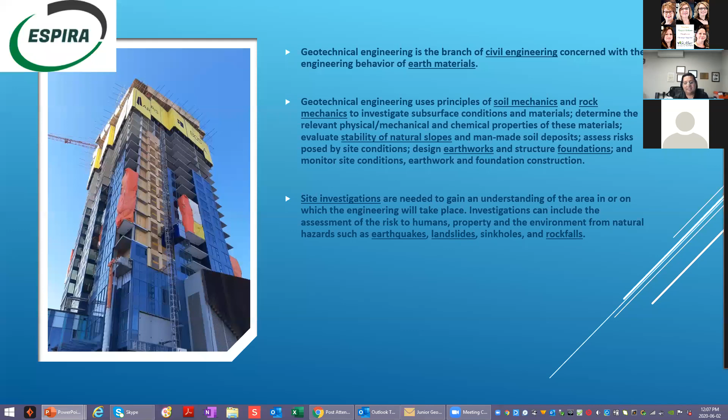Now, anytime you want to do a project, build a project like roads or high rises or commercial buildings, etc., the first thing you probably need, one of the very first essential things, is geotechnical engineering. Can we build what we're planning to build in that particular site? So that's, kind of in a nutshell, what geotechnical engineering is.

Now, a geotechnical report is generated for different audiences, so it means different things for different readers. For example, for an owner, what does it mean to the owner? If someone is deciding to buy land, a lot of times they get geotechnical engineering professionals involved to make sure that land is suitable for the purpose of their purchase.

Now, developers, they want to build high rises, things like that, commercial or residential buildings. So they want to know what challenges they will face. They hire the geotechnical engineer to assess, and that report explains if that land is suitable for the purpose.

The architect - a lot of times the owner, when they purchase land, hires an architect to hire all the other consultants and manage them. So one of the principal things the architect does is hire a geotechnical engineer to make sure that the foundation would be feasible and economical for everyone, so everybody would be winning at the end.

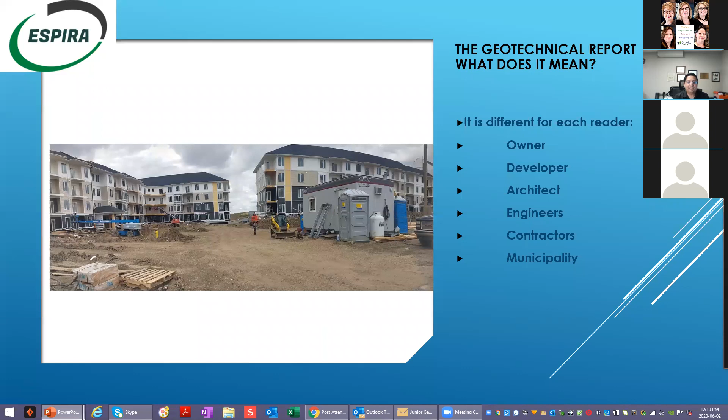So for municipalities, before any project goes ahead for a development permit, part of the requirement - one of the most essential requirements - is to have a geotechnical report.

Now geotechnical, when the geotechnical requests for proposal are sent out, a geotechnical engineer looks at the site and sees what the request is, like what they're trying to build. Based on that, they come up with a plan: okay, I'm going to do 5 boreholes to 10 meters, or I'm going to do 3 boreholes to 25 meters. It depends on the different type of project.

So I'm hearing a sound, sorry, I don't know. Okay.

So when that proposal is accepted, the first thing that geotechnical engineers do is place a one call, or one call clearance, in Alberta, or in Canada in general, before you drill, before you dig a hole, because there are so many pipelines going all over the country. So they place that one call to make sure that they are not going to hit anything.

That's required, so it's also a free service. A lot of times in already developed land, there are electrical lines, etc., going through, and in order to locate those, the geotechnical engineer also hires private locators. Safety is very important because we don't want anybody to get hurt, and that's the first thing that geotechnical engineers do after they get the project.

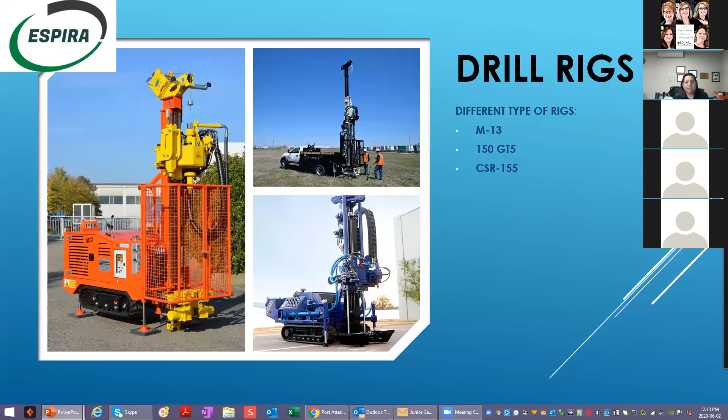So next, let's talk about the type of drill rigs and drilling techniques. Here it is, I hope you can hear it properly.

The 4 most common drilling techniques: solid stem augering with the open hole method, hollow stem augering method, the wash boring method, and the casing method. It will also cover the basics of pushed and driven samplers.

There are a number of types of drill rigs available. Some of the most common are large truck-mounted rigs, sometimes called highway rigs, off-road track-mounted rigs, and trailer-mounted or portable rigs. Different rigs are suited for different site conditions and different drilling and sampling methods.

The large truck-mounted rig is the most versatile and one of the most common drill rigs used. However, it can only be used in situations where it can be driven onto the site.

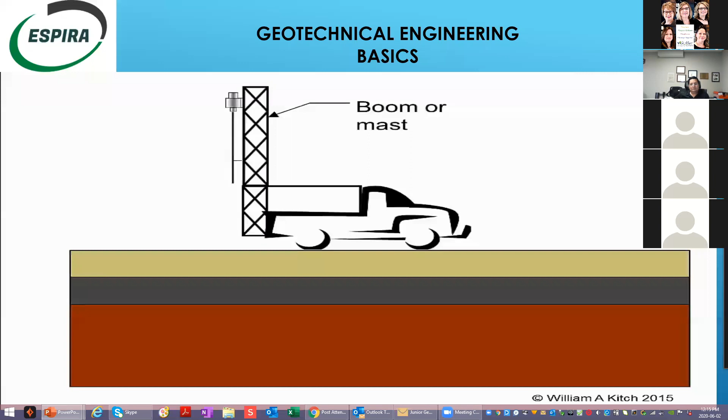The process of drilling is similar regardless of the type of drill rig used. First, we position the rig over the location where we wish to drill. Then we erect the drilling boom or mast and make sure it's vertical. A drill head mounted on the boom performs the drilling and sampling operation, providing two motions: a torque to rotate the bit, and a vertical thrust to raise and lower drill bits and other equipment.

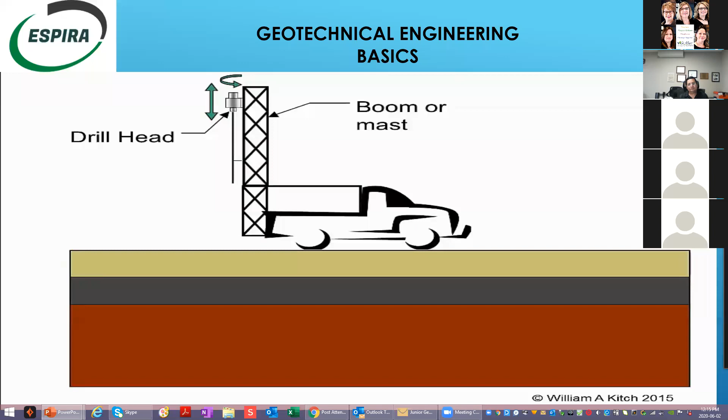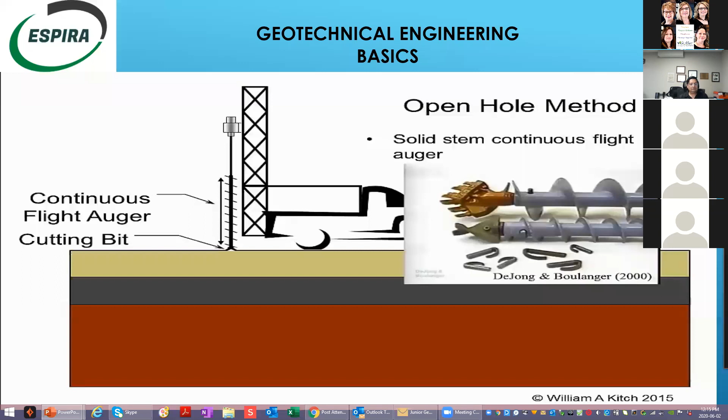The auger is rotated and pushed into the ground by the drill head. The bit at the tip of the auger loosens the soil at the bottom of the hole, and the flights carry the cuttings to the ground surface. An engineer or geologist can estimate when new soil layers are encountered by observing the changes in the cuttings as they're brought to the surface.

These cuttings can be collected as bulk samples. However, they are low-quality samples because they're completely disturbed by the cutting process, and because soil from the upper layers can contaminate soil from the lower layers as the cuttings are carried up the auger flights.

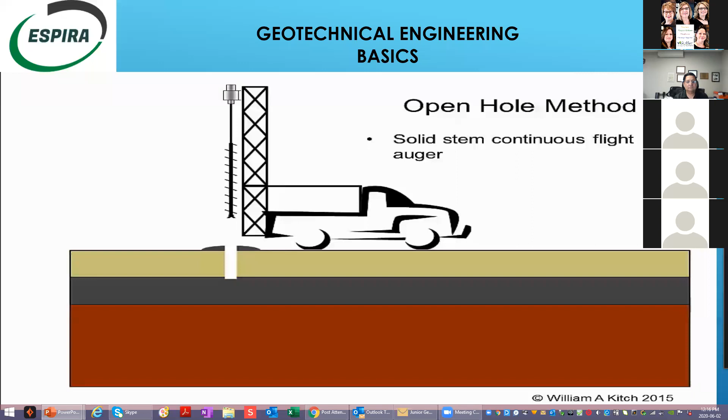When the boring reaches a depth where a higher quality sample is desired, the auger is removed from the hole to make room for the sampling equipment. In this method, the borehole must be able to stand open without support, which is why we call it the open hole method. When we wish to take a sample, we replace the auger bit with a sampling tool, or sampler. Nearly all soil samplers consist of some sort of hollow tube which is inserted into the soil to retrieve the sample. There are many different designs of samplers to suit different soil conditions, but the basic process of sampling is similar for most of these samplers.

The sample tool is lowered to the bottom of the boring and then pushed into the soil below the bottom of the boring. When the sampler has reached its full depth, the rods are twisted to shear off the bottom of the sampler, and the sampler containing the soil sample is retrieved from the boring. The sample is then stored for later analysis and testing.

The sampling tool is replaced with the auger, and the auger is lowered back down the hole. Augering continues until we reach a new layer where we wish to take another sample. The auger is then retracted from the hole and replaced by the sampling tool, and another sample is taken using the same process.

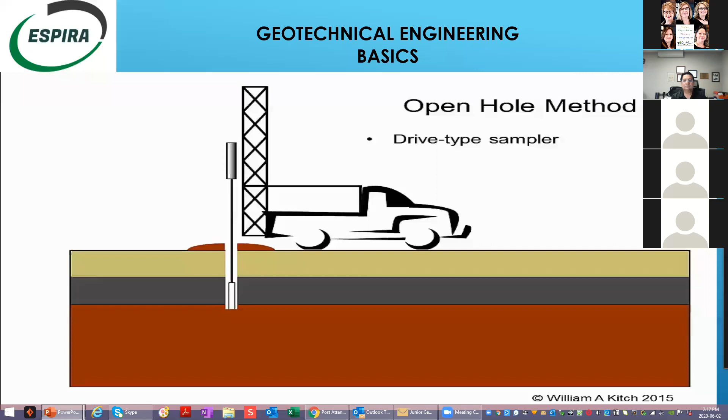When the soil is very stiff or dense, it's not possible to use a push-type sampler. In these circumstances, we use a heavy-walled sampler that can be driven into the soil using a drop hammer. The process is similar to retrieving a push-type sampler, but uses different equipment and a different sampler.

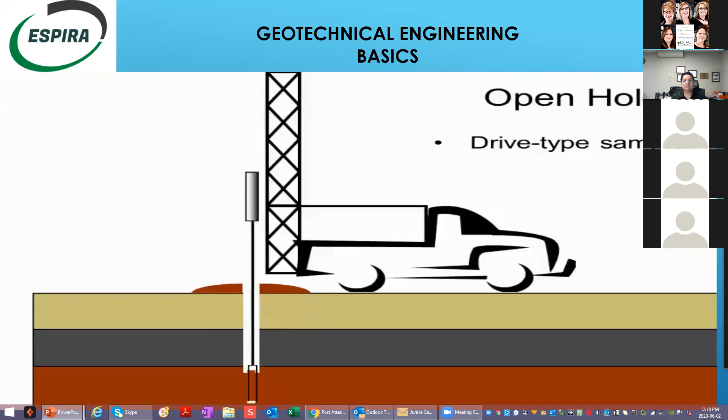The open hole method only works if the soil is stiff enough and strong enough to remain open after the augers are removed. While it is often possible to use the open hole method, many times the soil is not able to maintain an open hole for sampling.

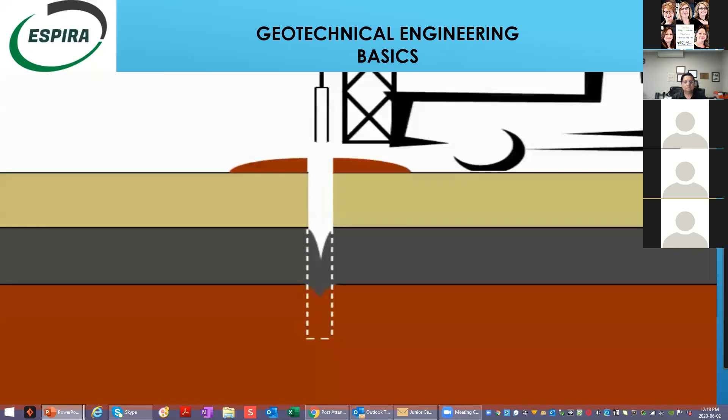If the soil is soft, it may squeeze into the boring when the augers are removed. This often happens in a soft clay layer. If the soil is a clean sand with little or no cohesion, the soil at the sides of the hole may cave or fall into the boring. This is particularly a problem when drilling in sands below the water table.

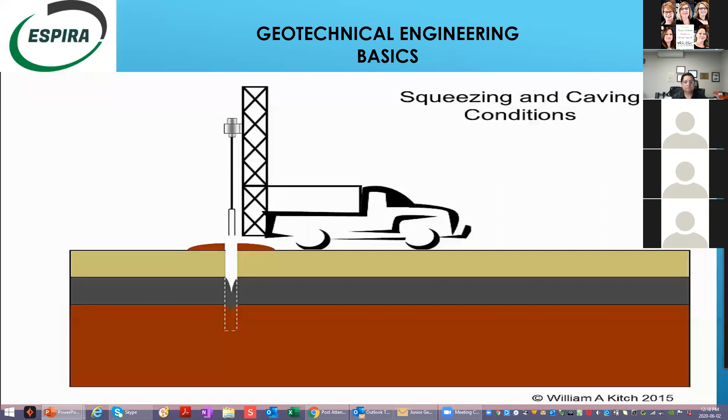When squeezing or caving conditions occur, we must use a different drilling method that will support the borehole during the sampling process. One method that can be used in caving or squeezing soil conditions is the hollow stem auger method.

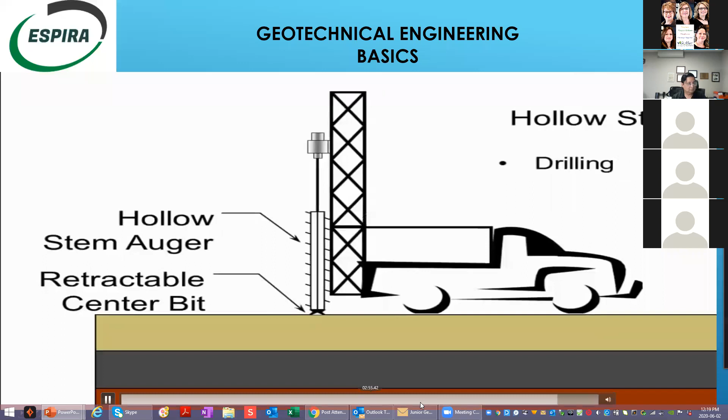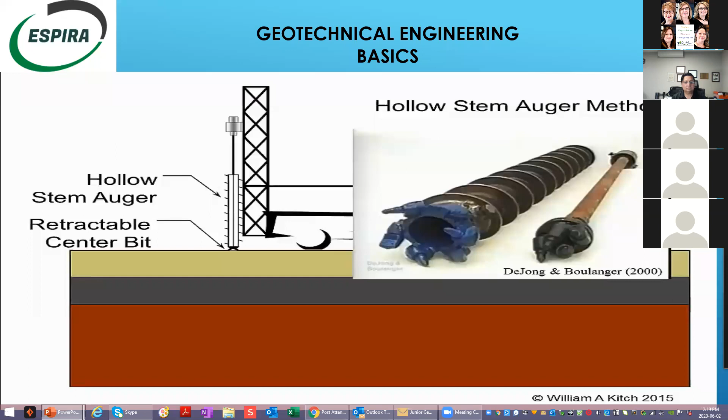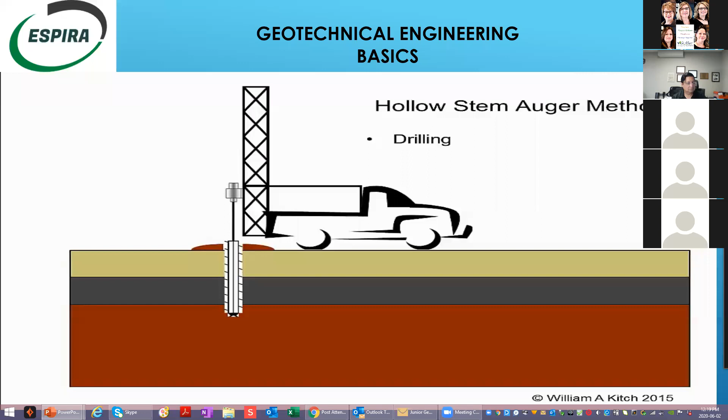For illustration purposes, the center bit has been removed and is shown next to the hollow stem auger. During drilling, the center bit is inserted inside the hollow stem. The augering process proceeds in the same fashion as with the open hole method. When we reach a depth at which we wish to take a sample, we stop augering, detach the center bit from the auger, and remove it.

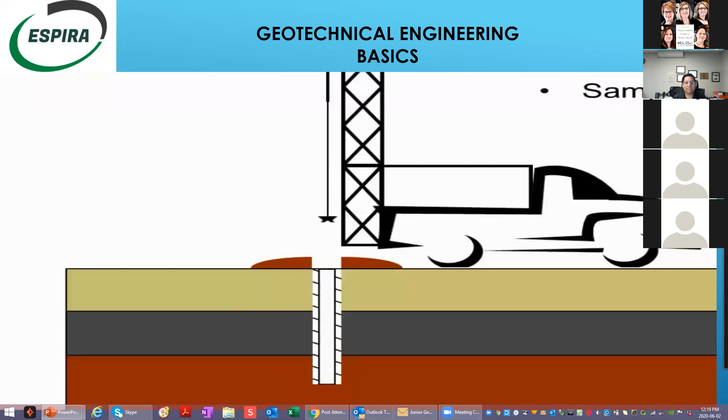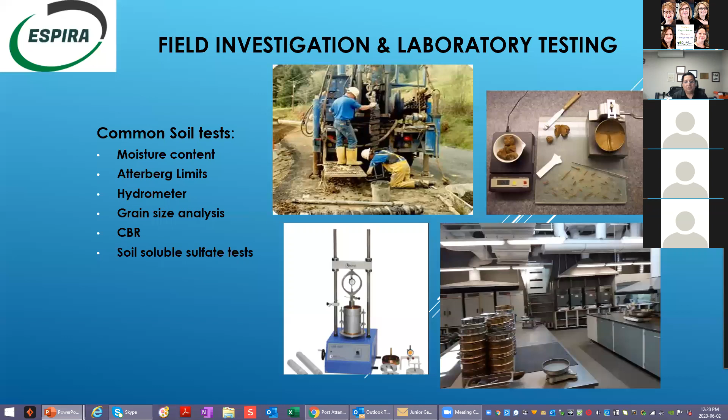About the drill rig. So after the sample is taken, it goes to the lab, similar to this one here, and we do very common soil tests. For example, moisture content is done on every sample, and the geotechnical engineer looks at the description of the soil, and based on that, they decide how many Atterberg limits they're going to do, how many hydrometer, grain size analysis, CBR tests, or soil soluble sulfate tests. This is very common in Alberta and in Canada. Typically, we do sulfate tests to see what type of cement needs to be used, because it's sometimes below the water table for the foundation.

So I just wanted to share some videos with you showing how a couple of these very common soil tests are done. Here's one technique, just a quick overview.

Zero the scale and place a clean, dry sample container with the lid on the scale platform. Record the tin number and the tare, or empty weight, of the container including the lid. Obtain a representative moisture content specimen and place it in the sample container.

Immediately cover the tin with the lid. Zero the scale and place the sample on the scale platform. Record the tare plus wet weight of the sample. Remove the lid and place it below the sample container.

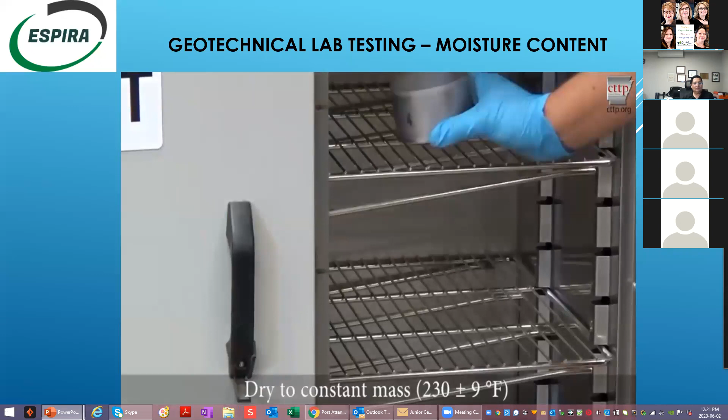Put the sample, container, and lid into the oven. Dry the sample to constant mass at a temperature of 230 plus or minus 9 degrees Fahrenheit. Constant mass means that the change in mass is less than 0.1% after 1 hour of drying. If the sample contains gypsum or has a high organic content, dry it at 140 degrees Fahrenheit or use vacuum desiccation.

Remove the sample, container, and lid from the oven. Immediately place the lid on top of the container to prevent the sample from absorbing atmospheric moisture. Allow the sample to cool to room temperature.

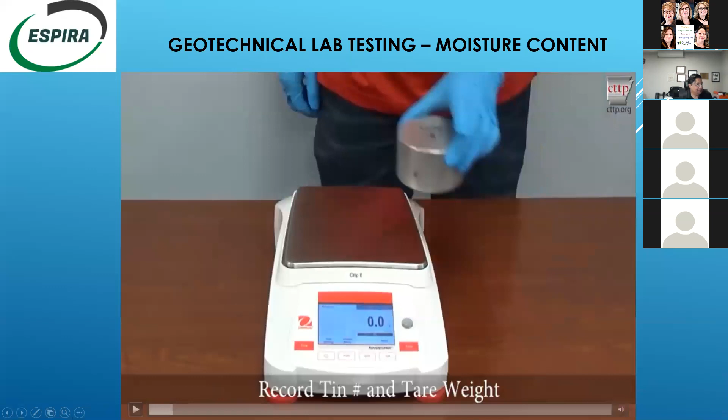Dry the sample to constant mass at a temperature of 230 plus or minus 9 degrees Fahrenheit. Constant mass means that the change in mass is less than 0.1% after 1 hour of drying. If the sample contains gypsum or has a high organic content, dry it at 140 degrees Fahrenheit or use vacuum desiccation.

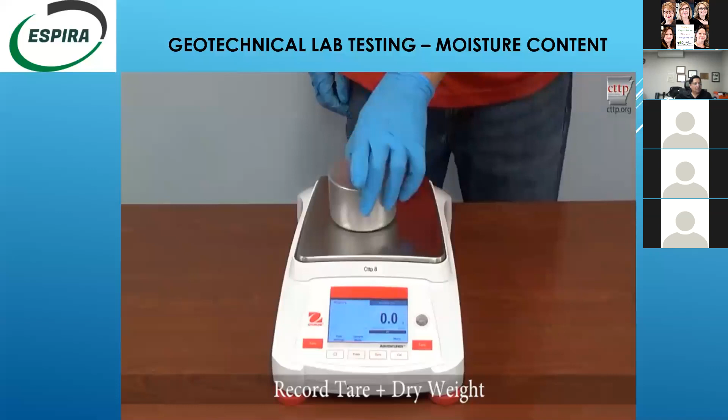Remove the sample, container, and lid from the oven. Immediately place the lid on top of the container to prevent the sample from absorbing atmospheric moisture. Allow the sample to cool to room temperature. Zero the scale and place the cooled sample container on the scale platform. Record the tare plus dry weight of the sample.

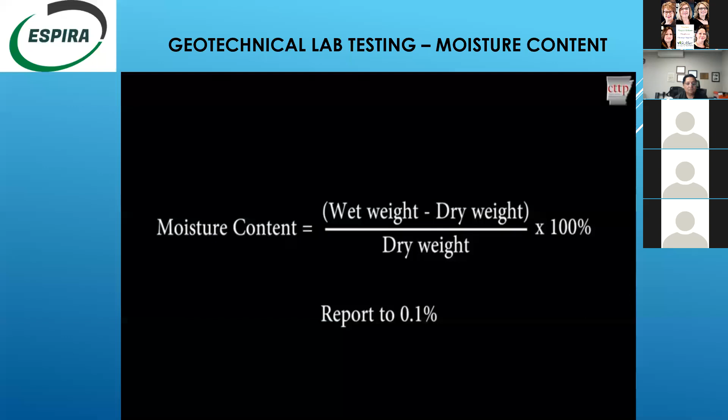Calculate the moisture content by dividing the difference in the wet and dry weights by the dry weight, and report to the nearest 0.1%. Note that for soils, the tare weight... So thank you, that's just a very basic test that we do as a geotechnical engineer in the lab.

And here is just a quick overview of what the hydrometer test is, how the hydrometer test is done, and what it means. This week we covered particle size distribution, and we used the hydrometer method to determine the texture of our soils.

So here we'll add 25 milliliters of SHMP, and now we're going to add 100 milliliters of water to this jar. So in here we have our soil, the SHMP, and 100 milliliters of water. Now we need to shake it vigorously for 3 to 5 minutes.

Having vigorously shaken our solution, we're now going to add it to our sedimentation jar, so we'll take the plunger out and add our solution to this sedimentation jar. You want to be sure whenever you're doing this in the future that you rinse out the inside, so you get everything from your shaking jar into your sedimentation jar.

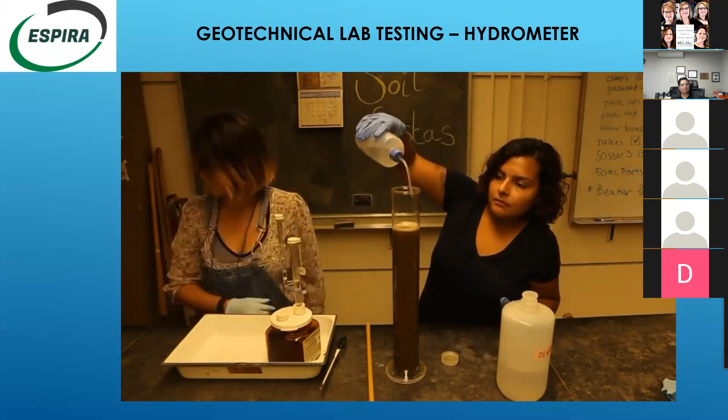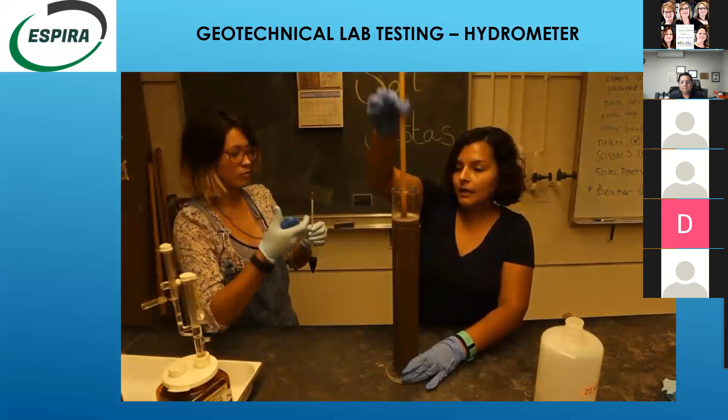Use a plunger to resuspend everything in the sedimentation jar. And then as soon as I take this out, Amy is going to set in the hydrometer and time for 40 seconds.

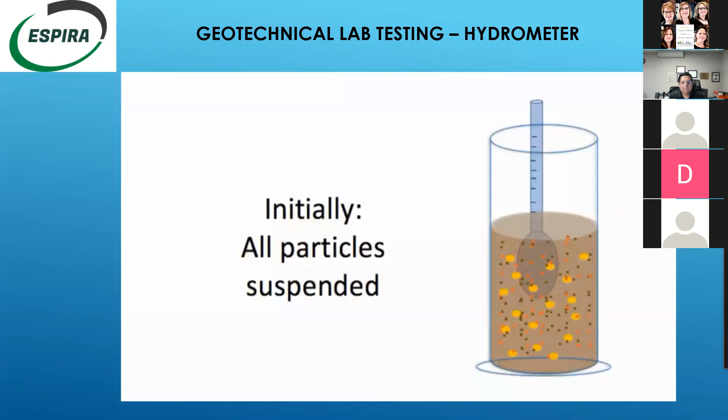That's our reading. This reading gives us the percent of silt and clay that's in solution, because after 40 seconds the sand has settled out and only the suspended clay particles and silt particles are pushing up on the hydrometer. So this reading we will use in our future calculation.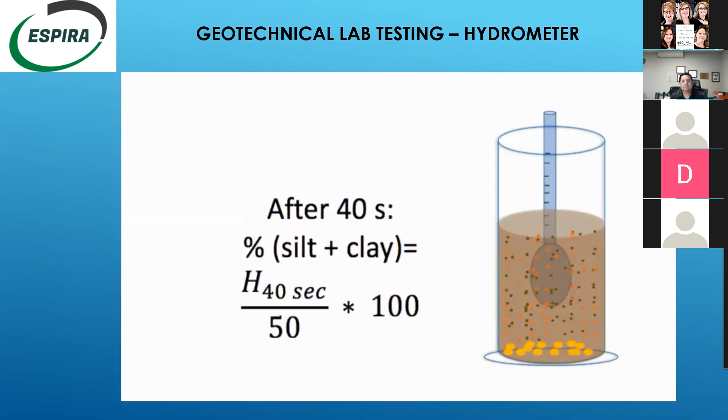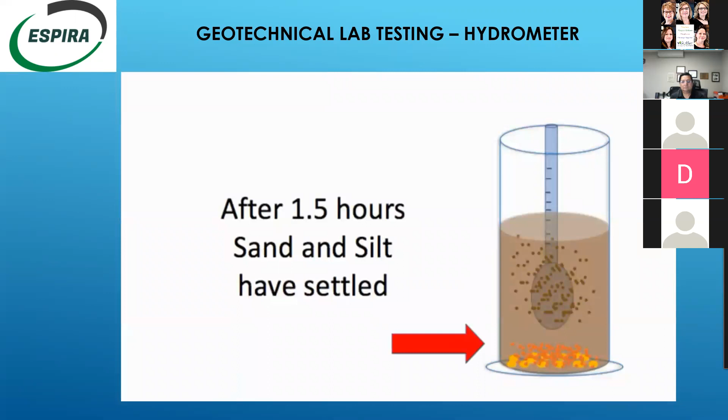Our next reading is in an hour and a half, so we'll see you then. So it's been an hour and a half. What we expect to be suspended is the clay, whereas the silt and all the sand particles have settled.

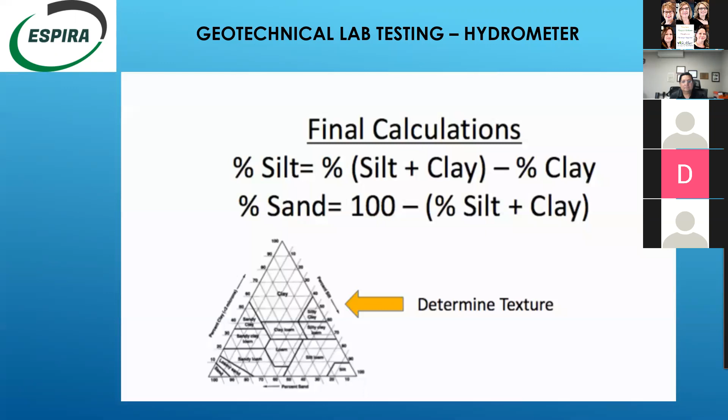So the next important section of the geotechnical report is the project description and site conditions, very important information for everyone involved. Then it talks about the investigation procedures, what procedures are used to perform the investigation, like how many holes, where the holes were taken, how deep they were, and what depth the samples were taken.

Then it talks about soil condition, like is it sandy, silty, or clay till. Clay till is a very common term in Western Canada, in Alberta and British Columbia.

Then it kind of inserts the lab results, like we showed some of the lab result procedures. Those lab tests are recorded in a form, and those forms are included in the report.

Then very important information is the groundwater condition, where the groundwater is. Typically what we do is install a piezometer on most projects, if the budget allows. Then a technician or geotechnical engineer in training goes to the site and reads that piezometer after a couple of weeks to get where the water table is, or it can be read over months to see where the water table sets, because the water table fluctuates depending on the season and what's going on in the surrounding areas.

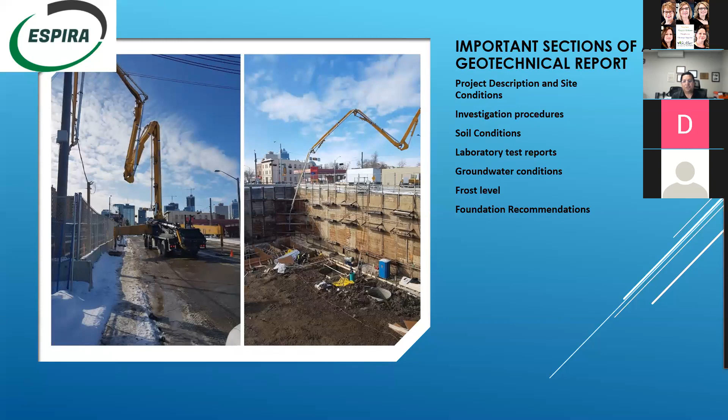Then we talk about the foundation recommendation, giving different options of foundation that can be used or built based on the soil condition. For example, it could be shallow foundations such as footings, so we give the parameters for that. And then we give parameters for deep foundation such as piles. Deep foundation could be a bit costly, so a lot of times if the project doesn't require deep foundations, the clients tend to go with footing foundations.

Also, a very common feature in recent years is the screw pile, so we also give the clients the screw pile option.

Then if the project has parking lots, etc., we give them options for what type of pavements can be used, both asphalt or concrete parking pavements. But we don't have all the information at the time, like ESAL values and all that, so we just give them very preliminary design parameters.

Then it also talks about earthworks, like what needs to be removed and replaced. If it's like Fort McMurray, there's a lot of organic material, and organic material is not very suitable for building purposes, so it has to be removed and replaced. We give guidelines on how that can be done and what type of compaction is required.

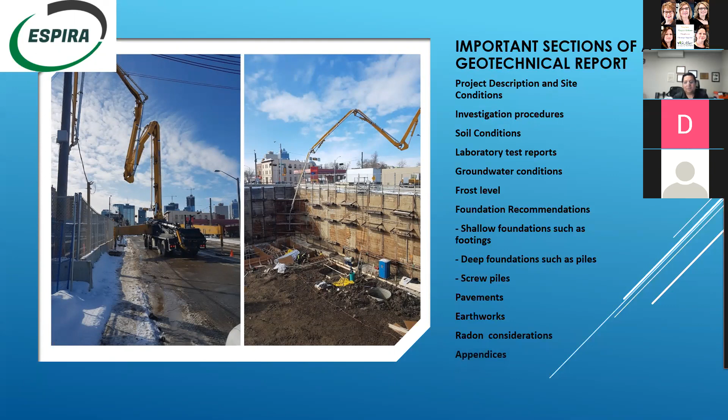Then, of course, at the end it has all the remaining details of the project. Now, geotechnical engineering is not complete as soon as the geotechnical report is done.

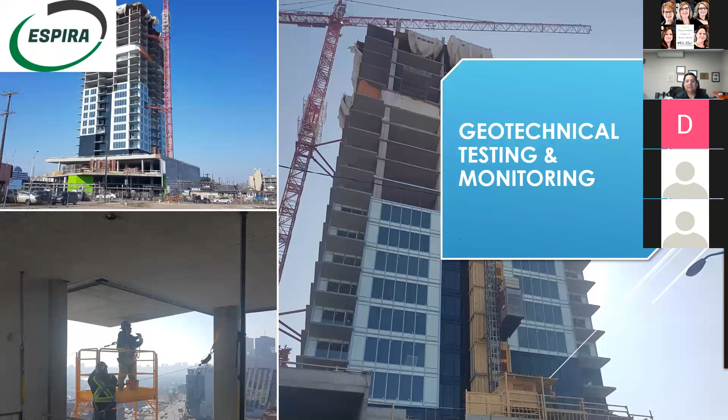The geotechnical engineer observes and records the pile foundations that the whole team decided to go with, making sure the pile foundations are at the right strata, have proper strength, and meet all the expectations that were initially assessed in the geotechnical report.

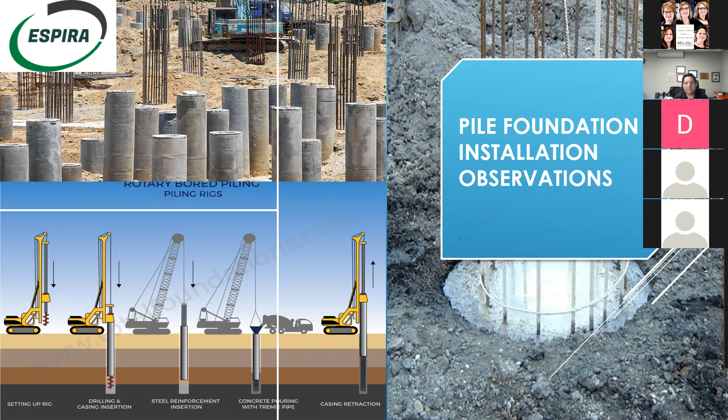Then for footing foundations, these footings are sometimes 10 meters deep or sometimes 6-7 meters deep. The geotechnical engineer makes sure they go and check the footing foundation, that it's free of debris and in the condition anticipated in the geotechnical report.

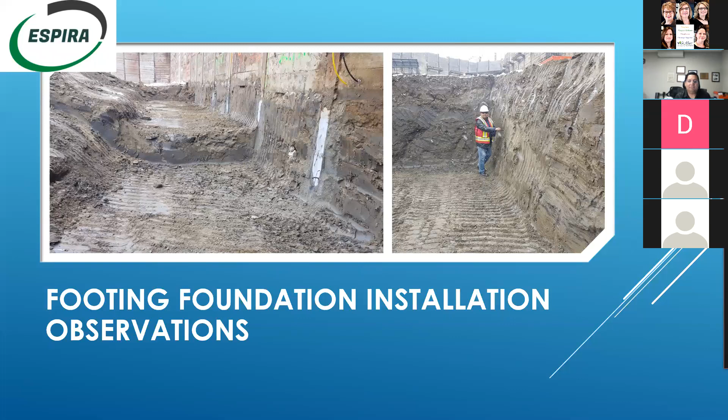So also the organic material or soft soil is removed and replaced with suitable fill. This falls under geotechnical engineering and material engineering field, where we check the compaction. This is just a quick video so you can understand how it's done.

Standard counts. Now I need to know how to actually run this gauge. Well, before you're ready to take a measurement, when you get to the job site, you'll want to find out a few things about the material you'll be testing. Talk to the job foreman or superintendent, ask them what kind of material it is, what the layer thickness is, what the specs are for the job, like the percent compaction you'll need to achieve, and the target density.

And if it's a soil material, the target moisture percent. Set your gauge measurement count time to at least 1 minute or longer if you can. Also set the proper mode, soil mode or asphalt mode. Soil mode would be for materials like clay, sand, aggregate, things that have moisture in them that helps the compaction process. Asphalt mode would be for asphalt material or non-cohesive aggregates.

I see. So every day I need to change these settings in this gauge? Not necessarily. The 1 minute count you'll probably use all the time. The soil or asphalt mode, maybe you'll change it, maybe not. Just depends on your job site.

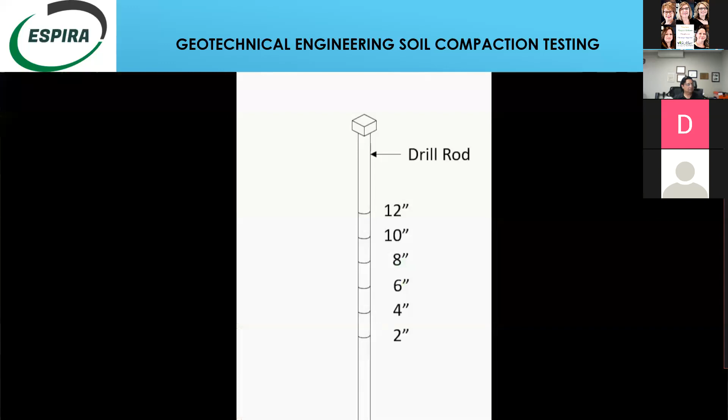There you go. Here we go. Go ahead and grab the extraction tool handles. Okay, and pull straight up.

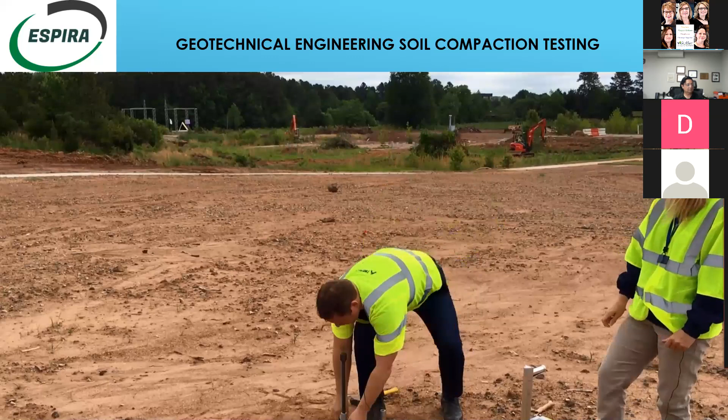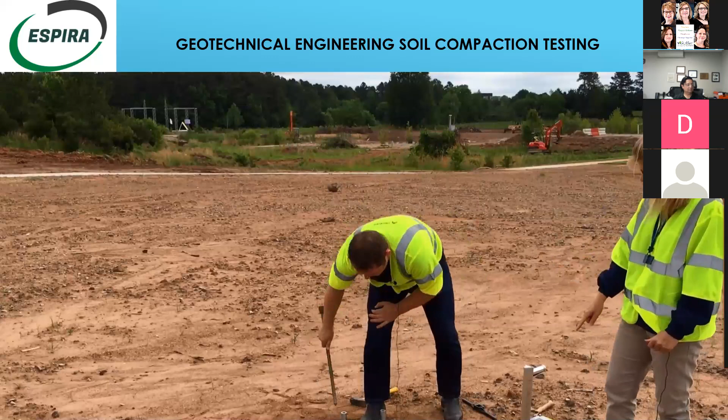Best thing to do is mark the front half of your plate. That way you'll have a footprint to set the gauge inside. So the front half, like a little bit on the sides is good, giving yourself a template to set the gauge inside. That's perfect.

Move the plate out of the way. It takes a little practice, but I can help you out. We'll put the gauge inside that footprint, right inside there, and lower the handle till you get past the 4-inch notch, then seat it in the 6-inch position.

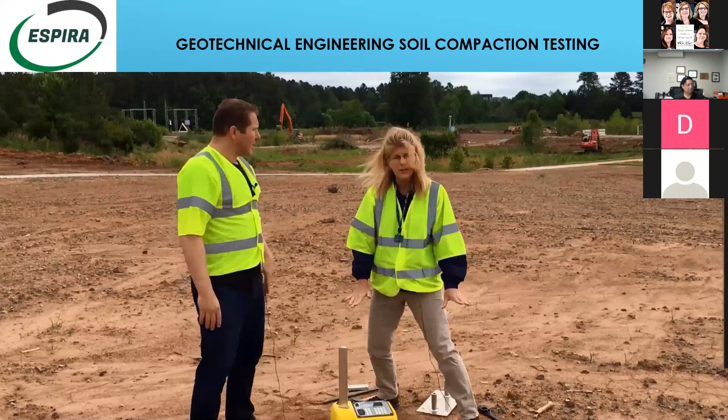Next thing you want to do is push the gauge this way. It won't move much, but it might move a little. Then press your start button and again take a step back while it counts.

Once it's done, you'll hear the beep and step forward, pull the handle up into the safe position, and go ahead and record your results or store them in the gauge.

Great, so not too difficult. Yeah, if you're not taking another reading right away, you'll want to go ahead and store the gauge in the vehicle locked up so it doesn't get lost or stolen.

Great, that's super straightforward. Thanks a lot, Robin. No, you're welcome. Okay, a couple questions that we got as a result of the last video.

So that's what we do, how we do the compaction test. Almost every site requires that. It doesn't matter if it's a road structure, bridge structure, high-rise, commercial building, even housing development sites like a whole subdivision. They have a lot of cut and fill associated on those sites.

Another thing we do very commonly is the concrete testing. The concrete is typically specified like 30 MPa, 45 MPa, or 50 MPa.

Per CSA guidelines, typically most of the design criteria is for 28 days, but a lot of times they require the strength to reach at 56 days.

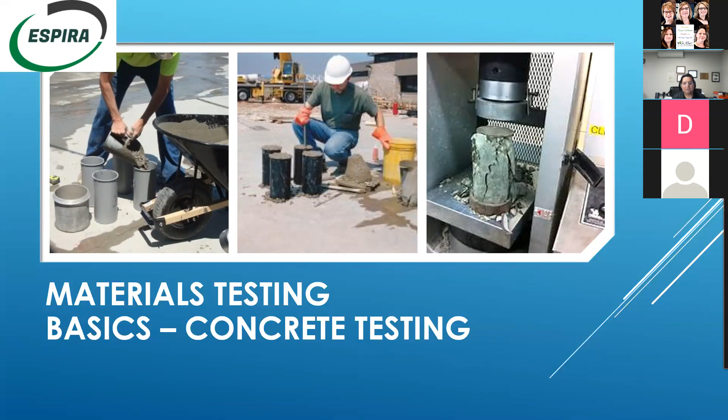We also do footing inspections, asphalt tests, etc. So geotechnical engineers are actually involved from the initial stage all the way to the completion of the project.

Now I hope you have enjoyed the presentation. It's just a quick one, I wanted to, it's a very large topic. Typically when I present to students at different universities, it's about two hours, so I had to squeeze it into 30 minutes because that's what was allowed. So now I will take questions if anybody has any.

I do have a question. What has been one of your most challenging projects, and what did you have to do to overcome some of the challenges you had with that particular project?

One of the very challenging projects we had geotechnically was at the Suncor site. Suncor is an oil sands company in Fort McMurray. They have very poor soil conditions, and they needed to build a very heavy structure for froth treatment. So we had to come up with a foundation design that's going to be in limestone, and the limestone was about 28 to 30 meters deep.